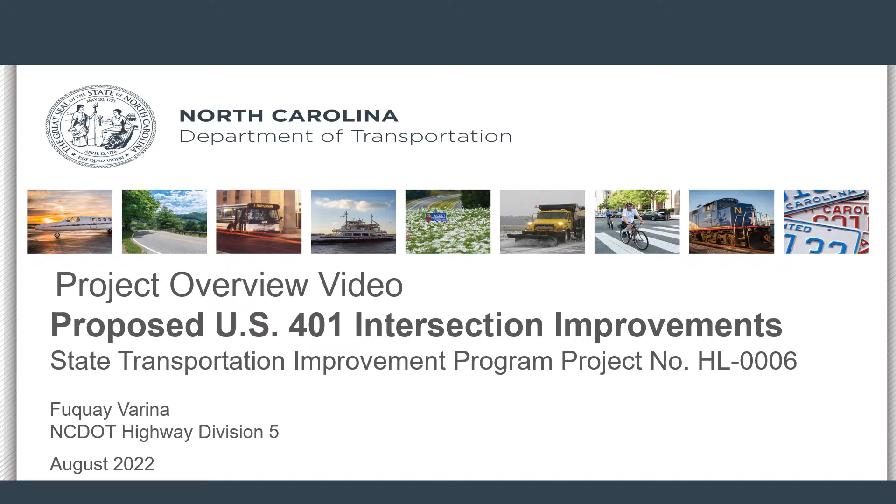The NCDOT Division 5 project manager for this project is Ahid Belush. VHB is the project consultant providing preliminary engineering. The project manager is Candice Andre.

NCDOT is proposing improvements along the US 401 corridor in Fuquay-Varina in southern Wake County. The project proposes to reconfigure several intersections along US 401 to reduced conflict intersections. These intersections include the US 401 intersections with Hilltop Needmore Airpark roads and with Lake Wheeler Road. The project would also realign Hilltop Road on new location to intersect US 401 opposite Lake Wheeler Road. Two alternatives are proposed, and each alternative has two options.

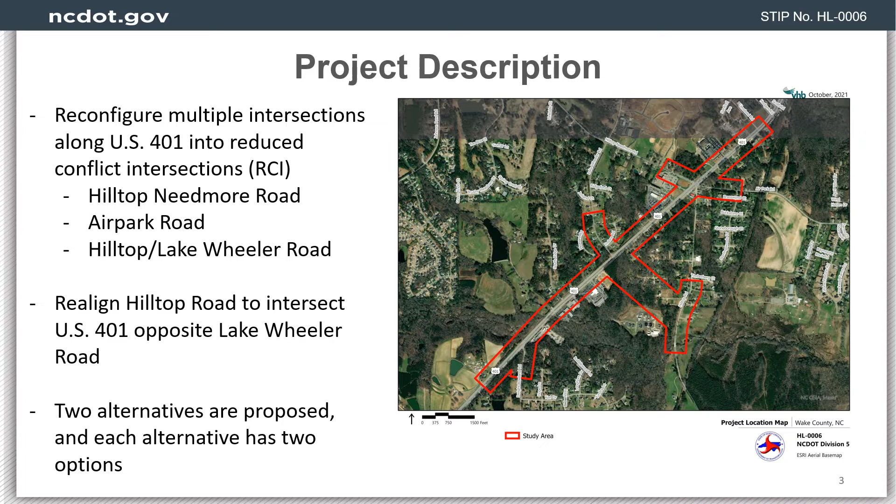This project addresses the need to reduce congestion and improve mobility along US 401 in southern Wake County. It will relieve present and future traffic congestion and improve mobility issues caused by traffic flow. Steady growth in the region has contributed to an increase in traffic congestion in this area. The facilities are currently operating with significant delays and operational deficiencies.

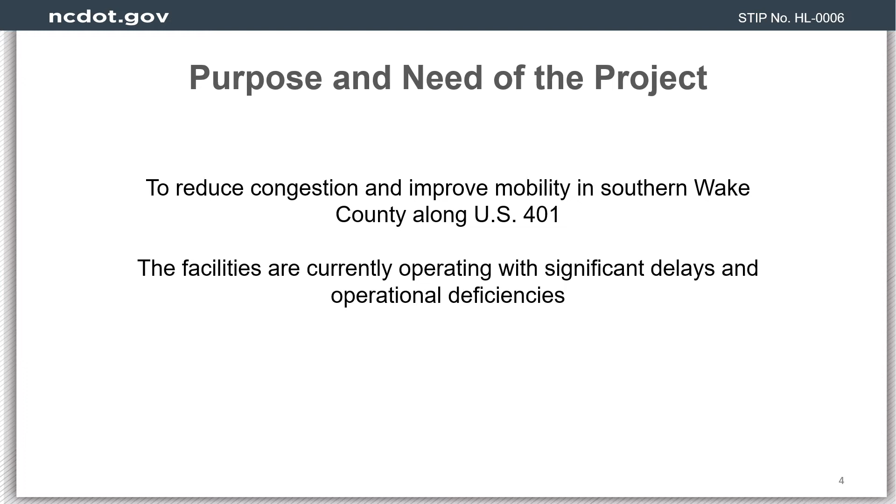Two alternatives are being considered for the corridor, and each alternative has two options. Alternative 1A would upgrade the US 401 corridor to include two 12-foot lanes in each direction, a 36-foot depressed median, 4-foot graded shoulders on the inside, 10-foot graded shoulders on the outside, a 5-foot sidewalk on the west side, a 10-foot multi-use path on the east side, a 30-foot clear zone between the shoulder and the sidewalk multi-use path, and a reduced conflict intersection at Lake Wheeler Road. This alternative proposes a 60 mph design speed.

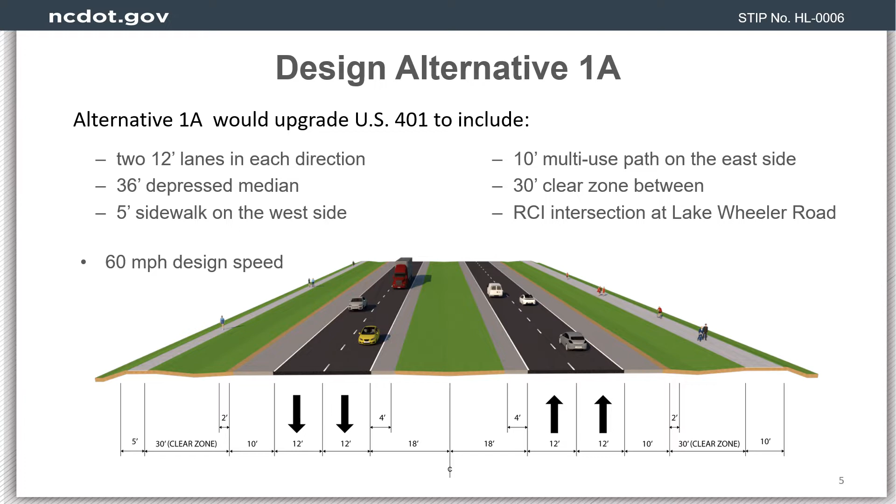Alternative 2A would upgrade the US 401 corridor to include two 12-foot lanes in each direction, a 23-foot raised median between curb and gutter on each side, a 5-foot sidewalk on the west side, a 10-foot multi-use path on the east side, a 4.5-foot clear zone between the back of curb and the sidewalk multi-use path, and a reduced conflict intersection at Lake Wheeler Road. This alternative proposes a 55 mph design speed.

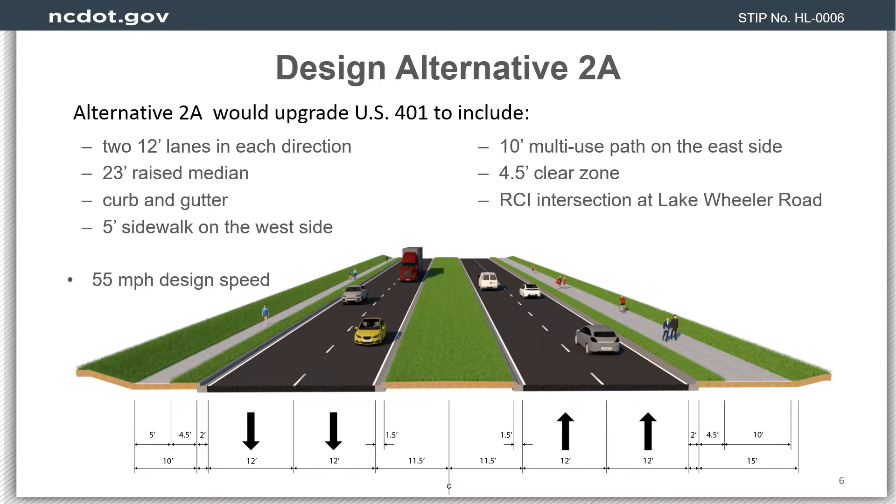Median openings and bulb outs to accommodate U-turns will be located within 800 to 1,000 feet of intersections on US 401. New traffic signals are proposed at the reconfigured intersections along US 401 and most of the U-turn locations. These signals will help facilitate U-turn movements, which will minimize impacts to businesses by allowing customers to more conveniently access businesses along US 401.

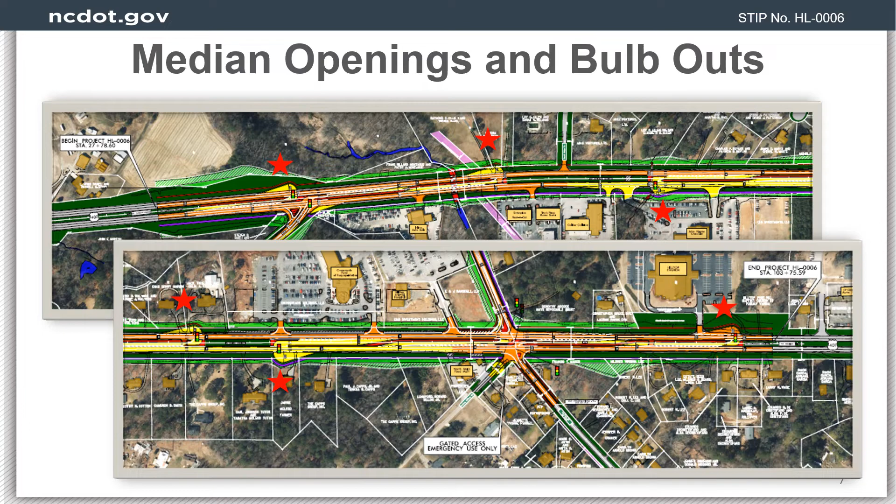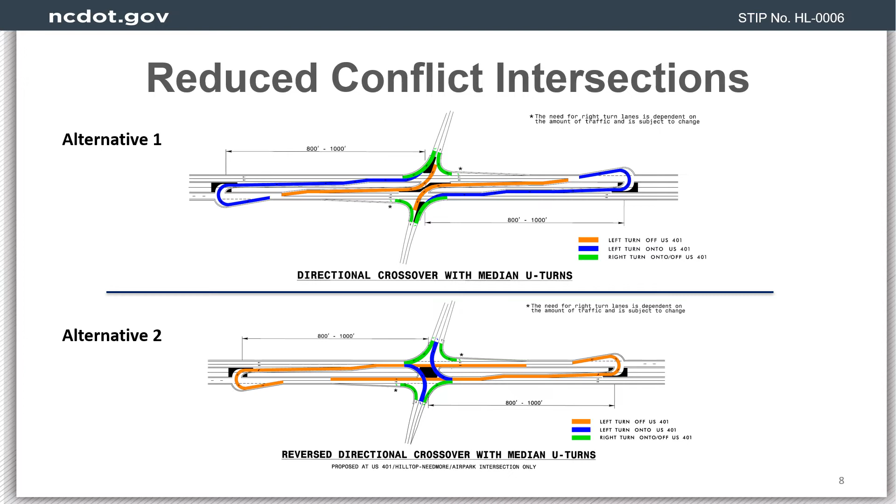Both alternatives propose the same typical section for Lake Wheeler Road and the realigned portion of Hilltop Road. The project proposes one 12-foot lane in each direction with graded shoulders, a 5-foot sidewalk, and a 10-foot multi-use path, with the sidewalk and multi-use path being separated from the travel lanes by a 20-foot clear zone.

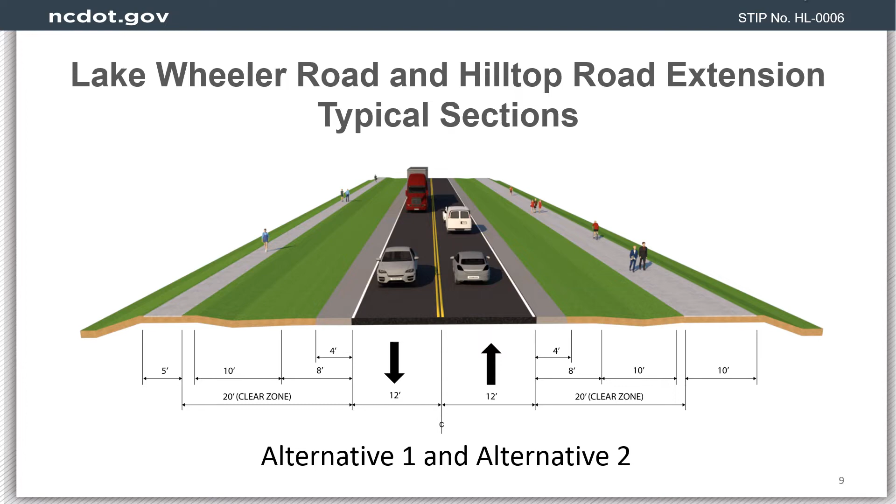At Dwight Rowland Road, two alternatives are being proposed. Option 1 would provide graded shoulders and no bicycle or pedestrian amenities. Option 2 would provide a 5-foot sidewalk on both sides of the roadway. The sidewalks would be separated from the back of curb by a 4.5-foot clear zone.

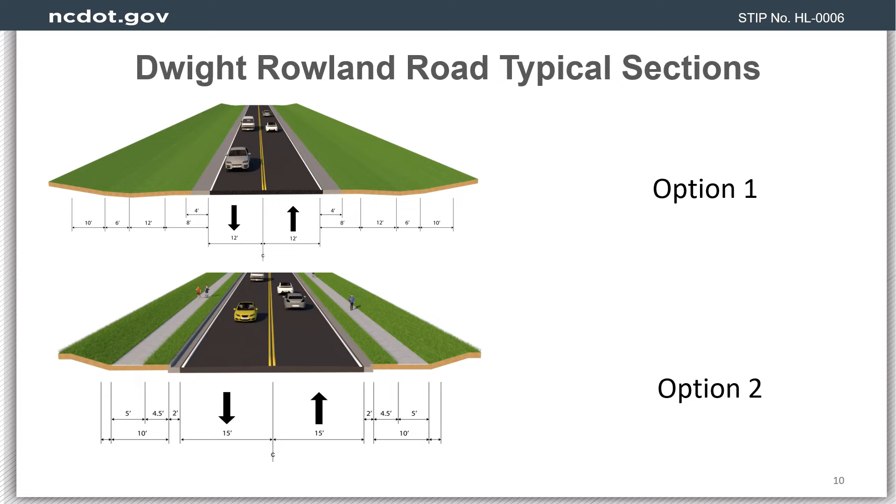The typical section for the new realigned Hilltop Needmore Road is very similar on both alternatives. Alternative 1 would provide curb and gutter and sidewalks on both sides of the roadway with the sidewalk separated from the back of curb. Alternative 2 would provide curb and gutter, a 5-foot sidewalk on one side, and a 10-foot multi-use path on the other. The sidewalk and multi-use path would be separated from the back of curb by a 4.5-foot clear zone.

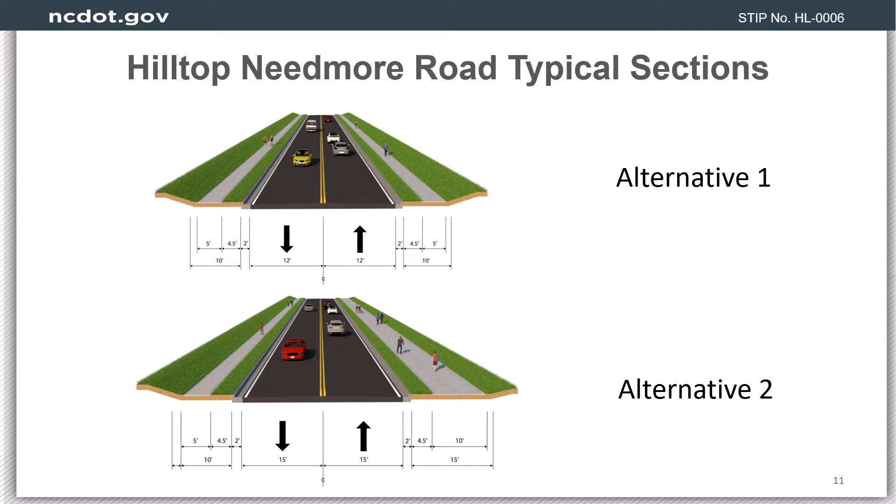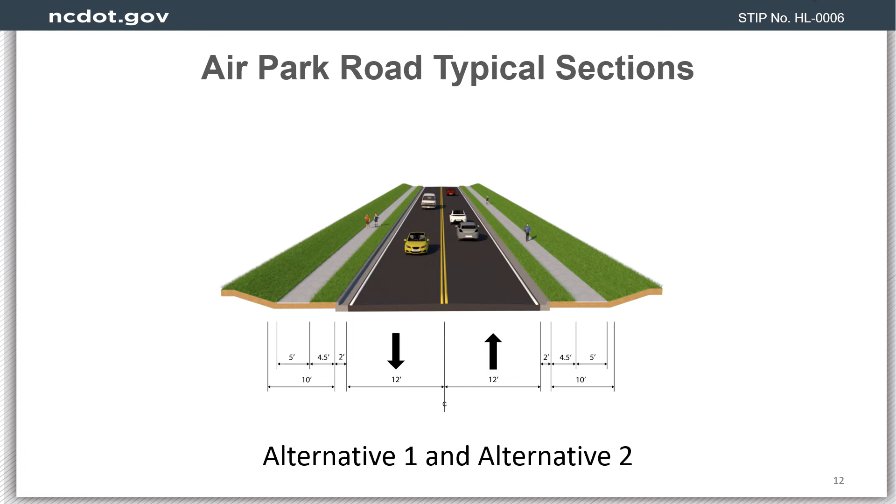The Air Park Road typical section is the same for both alternatives, with curb and gutter and a 5-foot sidewalk on both sides of the roadway. The sidewalks are separated from the back of curb by a 4.5-foot clear zone. The last typical section is for the existing Hilltop Road. Alternative 1 proposes graded shoulders with no bicycle or pedestrian facilities. Alternative 2 proposes curb and gutter with a 5-foot sidewalk on both sides of the roadway. The sidewalks are separated from the back of curb by a 4.5-foot clear zone.

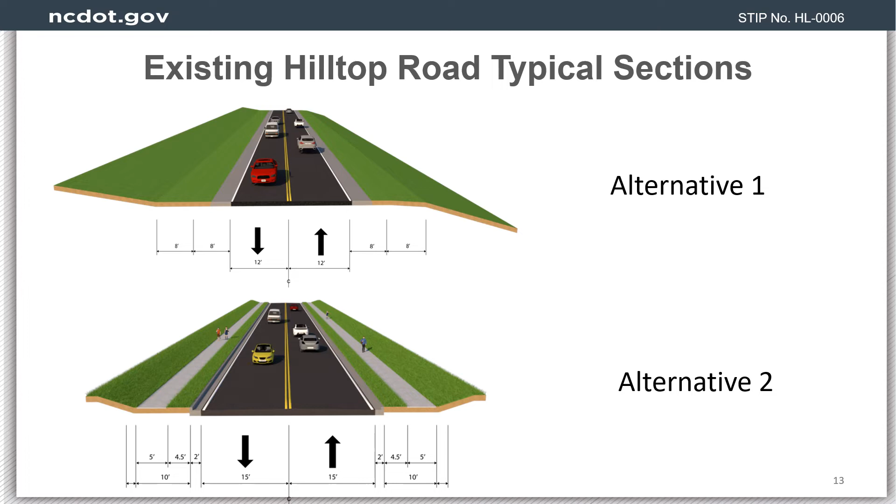Because the project will be constructed with federal transportation funds, project planning must follow a process outlined by the National Environmental Policy Act, or NEPA. The NEPA process requires federal agencies to investigate and consider the environmental effects of their proposals, document the analysis of these effects, and make this information available to the public.

An environmental document known as a categorical exclusion, or CE, is being prepared for this project. This type of document is prepared for projects that typically do not have significant environmental impacts. The CE looks at potential impacts of the project to water resources, the local community, wildlife, and any historic and archaeological sites.

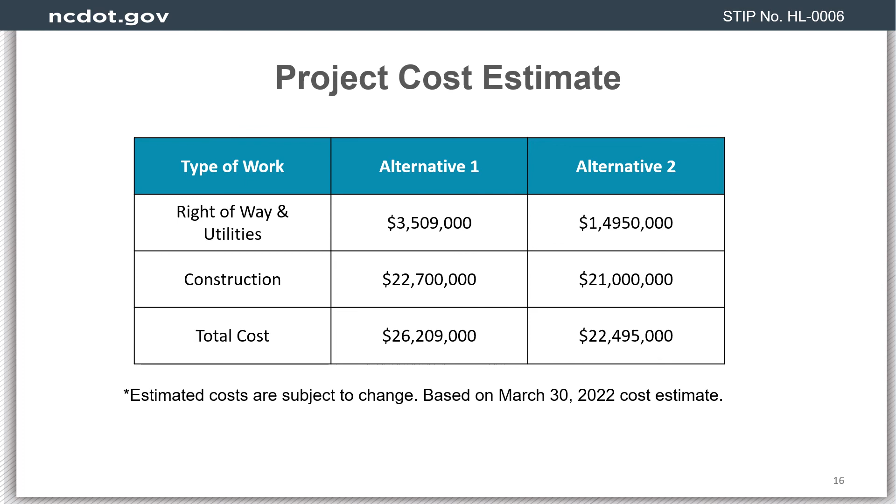This project is included in NCDOT's 2020 to 2029 State Transportation Improvement Program, or STIP, as Project HL-0006. For both design alternatives presented, cost estimates were calculated. For Alternative 1, the design with graded shoulders, the total estimated cost is $26,209,000. For Alternative 2, the design with curb and gutter, the total estimated cost is $22,495,000. All costs are preliminary estimates and subject to change.

NCDOT encourages you to view all project materials and submit questions and comments to the project team. The project map, typical sections, and other materials can be viewed or downloaded from the project website. If you have questions or comments, you may submit them on the project website or send us an email. You may also call the project number to leave a message, and if necessary, someone from the project team will reach out to you. Comments on the proposed project should be provided to NCDOT by September 9th, 2022. Don't forget to sign up on the website for project updates.